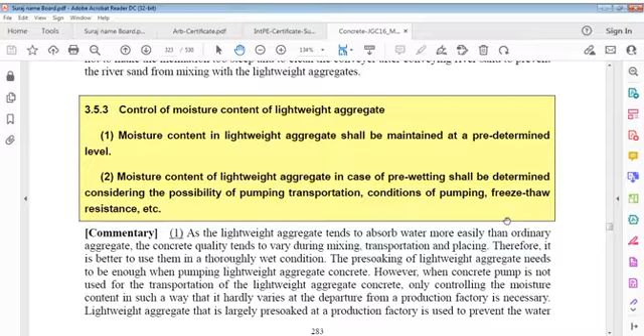I will just refresh the last paragraph - transportation systems, lightweight aggregate. We talked about control of moisture content of lightweight aggregate, and also about mixing. How the concrete mix should be, what it should be, this is also very important.

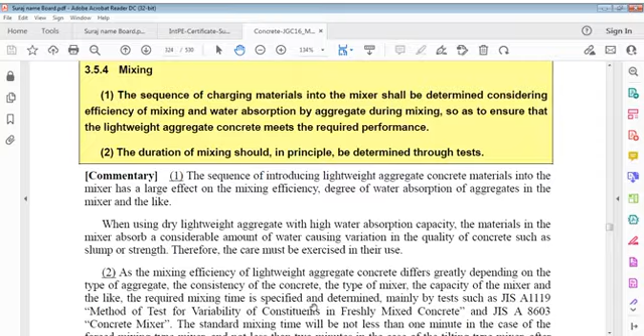Duration of mixing should in principle be determined through tests. Sequence of introducing lightweight aggregate concrete materials into mixer has a large effect on mixing efficiency, degree of water absorption of aggregate in mixer, and the like. In whichever sequence we put those materials into the mixer, it makes a difference to the concrete and to mixing efficiency.

We need all the materials put into the mixer to mix properly in the correct manner. Sequence of introducing lightweight aggregate concrete materials into mixer has a large effect on mixing efficiency, degree of water absorption.

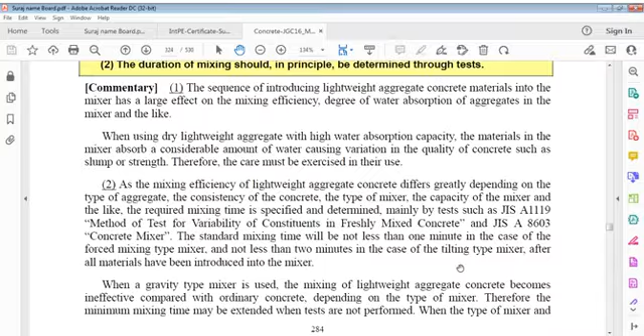Dry lightweight aggregate. When using dry lightweight aggregate, the high water absorption capacity materials in the mixer absorb a considerable amount of water, causing variation in quality of concrete, such as slump or strength.

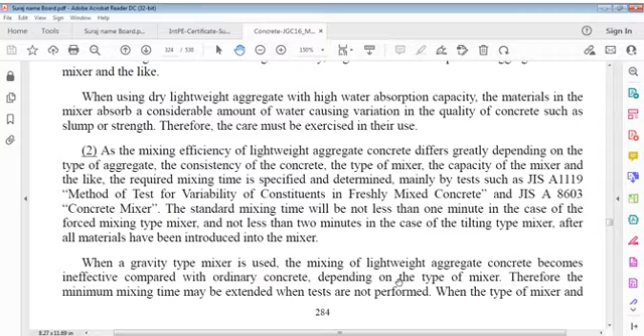Therefore, care must be exercised in respect to use. As mixing efficiency of lightweight aggregate concrete differs greatly depending on type of aggregate, consistency of concrete, type of mixer, capacity of mixer, and the like, required mixing time is specified and determined mainly by tests.

Method of tests for variability of constituents in freshly mixed concrete.

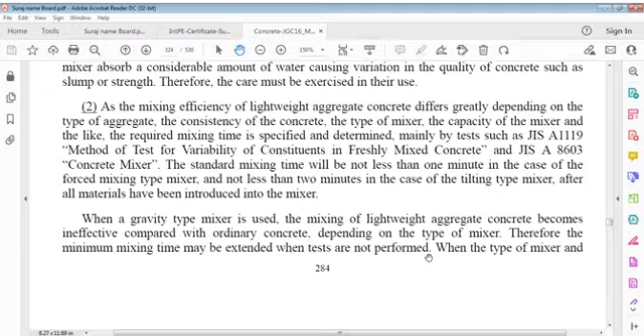Standard mixing time shall be not less than 1 minute in case of forced mixing type mixer and not less than 2 minutes in case of tilting type mixer after all materials have been introduced into mixer. When a gravity type mixer is used, mixing of lightweight aggregate concrete becomes ineffective compared with ordinary concrete depending on type of mixer. Therefore, minimum mixing time may be extended when tests are not performed.

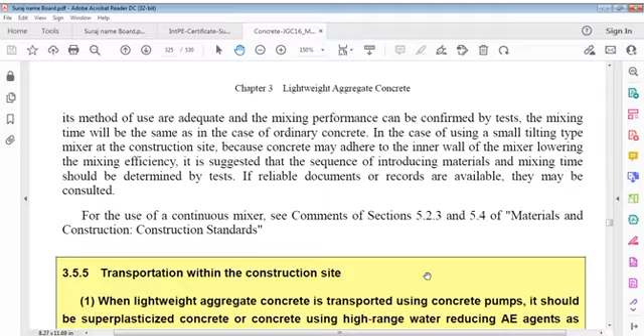Its method of use are adequate and mixing performance can be confirmed by tests. Mixing time shall be same as in case of ordinary concrete. In case of a small tilting type mixer at construction site, because concrete may adhere to inner wall of mixer, lowering mixing efficiency, it is suggested that sequence of introducing materials and mixing time should be determined by tests.

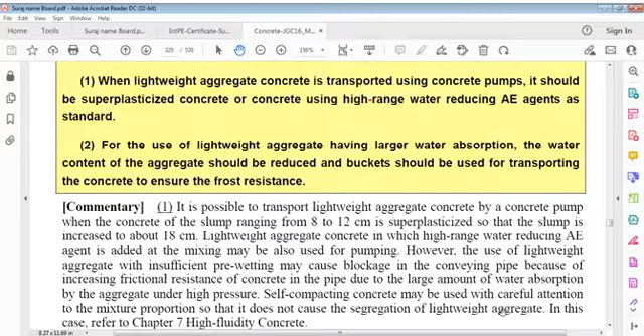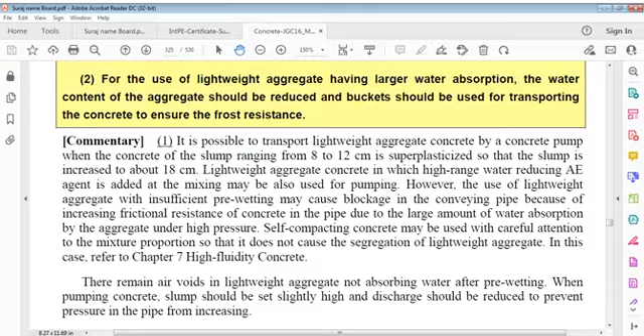For use of lightweight aggregate having large water absorption, water content of aggregate should be reduced, and buckets should be used for transporting concrete to ensure frost resistance.

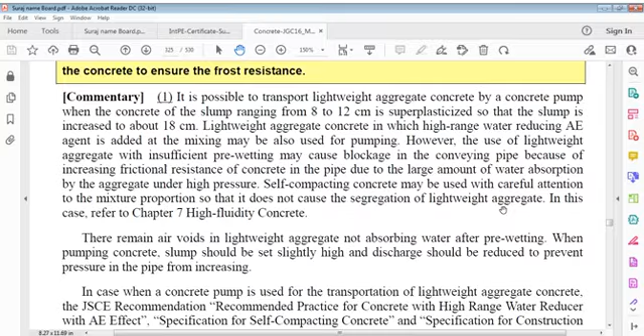It is possible to transport lightweight aggregate concrete by a concrete pump when concrete of slump ranging from 80 to 120 mm is superplasticized so that slump is increased to about 180 mm. Lightweight aggregate concrete in which high-range water-reducing and air-entraining agent is added at mixing may also be used for pumping.

However, use of lightweight aggregate with insufficient pre-wetting may cause blockage in conveying pipe because of increasing frictional resistance of concrete in pipe due to large amount of water absorption by aggregate under high pressure.

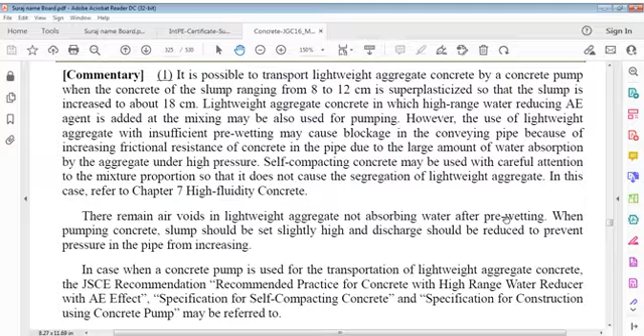Self-compacting concrete may be used with careful attention to mixture proportions so that it doesn't cause segregation of lightweight aggregate. In this case, we have to study high fluidity concrete.

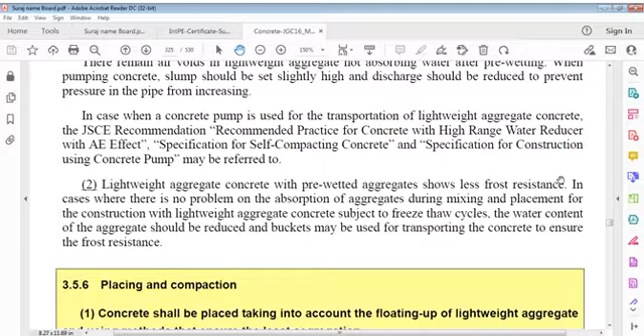When pumping concrete, slump should be set slightly high and discharge should be reduced to prevent pressure in pipe from increasing. In case a concrete pump is used for transportation of lightweight aggregate concrete, recommendations we have to see about concrete with high range water reducer with air entraining effect.

Then specifications for self-compacting concrete and specifications for concrete using concrete pump.

Lightweight aggregate concrete with pre-wetted aggregate shows less frost resistance. In cases where there is no problem on absorption of aggregates during mixing and placement for construction with lightweight aggregate concrete subject to freeze-thaw cycles, water content of aggregate should be reduced and buckets may be used for transporting concrete to ensure frost resistance.

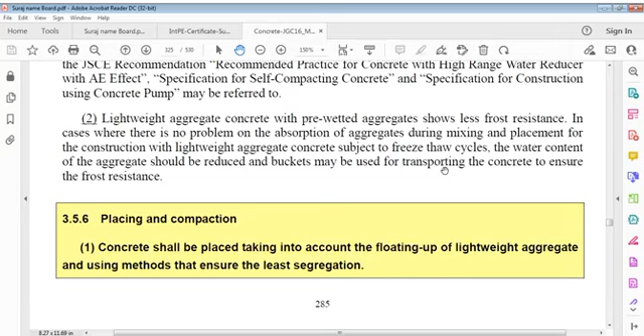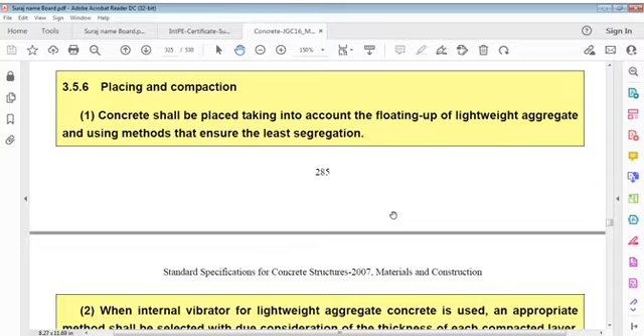Concrete shall be placed taking into account floating up of lightweight aggregate and using methods that ensure least segregation.

When internal vibrator for lightweight aggregate concrete is used, an appropriate method shall be selected with due consideration of thickness of each compacted layer, duration of vibration, and spacing interval between vibrated points.

When an internal vibrator for lightweight aggregate concrete is used, an appropriate method shall be selected with due consideration of the thickness of each compacted layer, duration of vibration, spacing, and interval between vibrated points.

Segregation of lightweight aggregate concrete occurs because coarse aggregate tends to float and mortar tends to sediment, which is the reverse tendency to that of normal weight concrete.

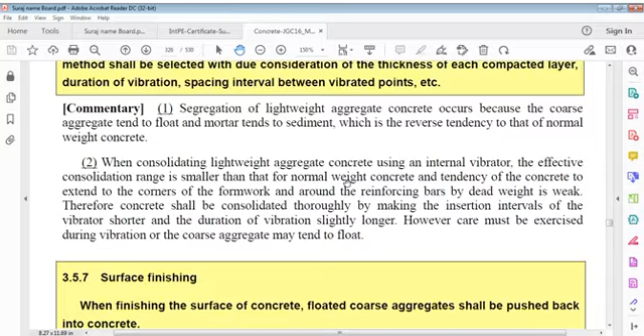When consolidating lightweight aggregate concrete using an internal vibrator, the effective consolidation range is smaller than that for normal weight concrete, and the tendency of concrete to extend to corners of formwork and around reinforcing bars by dead weight is weak. Therefore, concrete shall be consolidated thoroughly by making insertion intervals of the vibrator shorter and duration of vibration slightly longer. However, care must be exercised during vibration, as coarse aggregate may tend to float.

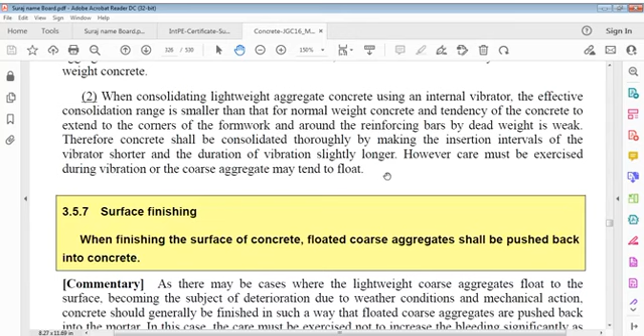Therefore, concrete shall be consolidated thoroughly by making insertion intervals of the vibrator shorter and duration of vibration slightly longer. However, care must be exercised, as during vibration coarse aggregate may tend to float.

Surface finishing: what to do, how to do it, that's also an important point.

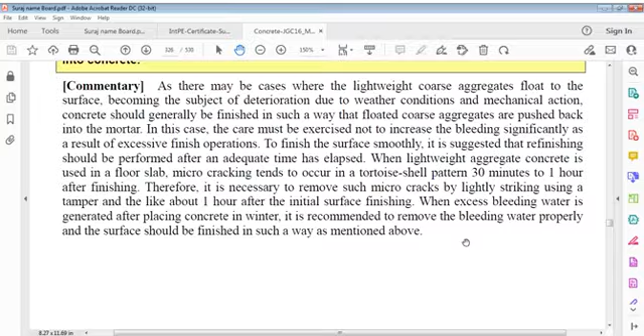When lightweight aggregate concrete is used in a floor slab, micro cracking tends to occur in a tortoise shell pattern 30 minutes to 1 hour after finishing. Therefore, it is necessary to remove such micro cracks by lightly striking using a tamper, about 1 hour after initial surface finishing. When excess bleeding water is generated after placing concrete in winter, it is recommended to remove bleeding water properly and the surface should be finished as mentioned above.

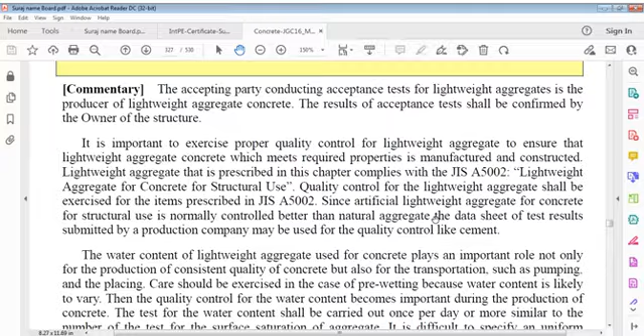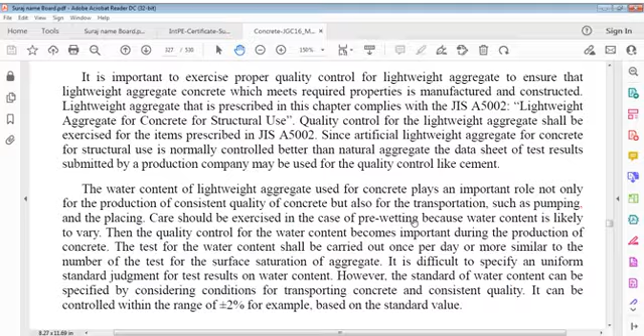Lightweight aggregate for concrete for structural use shall be as prescribed in this chapter. Quality control for lightweight aggregate shall be exercised for its items. Since artificial lightweight aggregate for concrete for structural use is normally controlled better than natural aggregate, data sheet of test results submitted by a production company may be used for quality control, like cement.

Water content of lightweight aggregate used for concrete plays an important role, not only for production of consistent quality of concrete, but also for transportation such as pumping and placing. Care should be exercised in case of pre-wetting because water content is likely to vary. Quality control for water content becomes important during production of concrete.

Test for water content shall be carried out once per day or more, similar to the number of tests for surface saturation of aggregate. It's difficult to specify a uniform standard judgment for test results on water content. However, a standard of water content can be specified by considering conditions for transporting concrete and consistent quality. It can be controlled within a range of plus minus 2%, for example, based on the standard value.

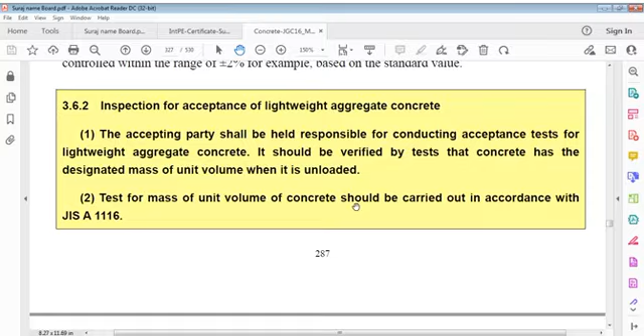Lightweight aggregate concrete acceptance inspection: the accepting party or engineer shall be held responsible for conducting acceptance test for lightweight aggregate. It should be verified by tests that concrete has designated mass of unit volume when it is unloaded. Tests for mass of unit volume of concrete should be carried out in accordance with this. Mass of unit volume of concrete shall be within the range specified at the design stage.

Difference between bulk density obtained by test and that calculated from specified mix proportion shall be less than 50 kg per meter cube. Mass of unit volume of concrete shall be within the range specified at the design stage. In addition, the difference between bulk density obtained by test and that calculated from specified mix proportion shall be less than 50 kg per meter cube.

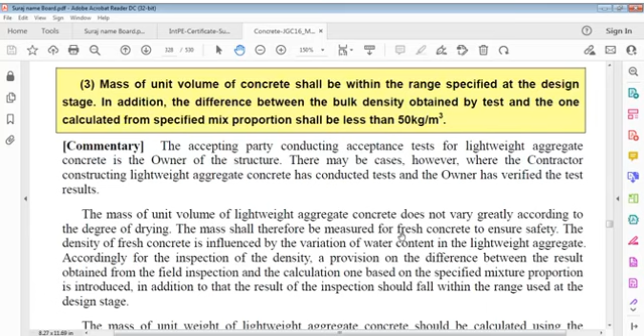Accepting party or engineer conducting acceptance test for lightweight aggregate concrete is the owner of the structure. There may be cases, however, where the contractor constructing lightweight aggregate concrete has conducted tests and an engineer or owner has verified the test results. Mass of unit volume of lightweight aggregate concrete does not vary greatly according to degree of drying. Mass shall therefore be measured for fresh concrete to ensure safety.

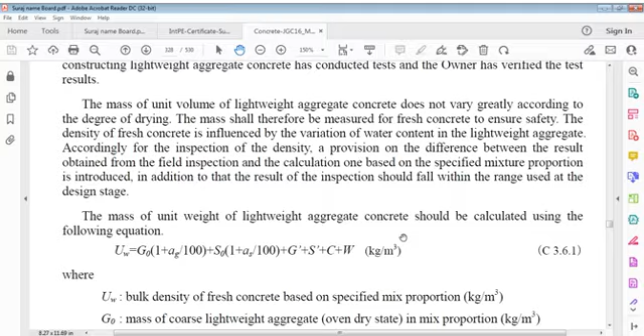Density of fresh concrete is influenced by variation of water content in lightweight aggregate. Accordingly, for inspection of density, a provision on the difference between the result obtained from field inspection and calculation based on specified mixture proportion is introduced, in addition to the requirement that the result of inspection should fall within the range used in the design stage. Mass of unit weight of lightweight aggregate concrete should be calculated using the following equation.

UW is equal to G0(1 + AG/100) + S0(1 + AS/100) + G + S + C + W, in kilogram per meter cube, where UW is the bulk density of fresh concrete based on specified mixed proportion, in kilogram per meter cube. G0 is the mass of coarse lightweight aggregate in oven dry state in mixed proportion, in kilogram per meter cube. AG is...

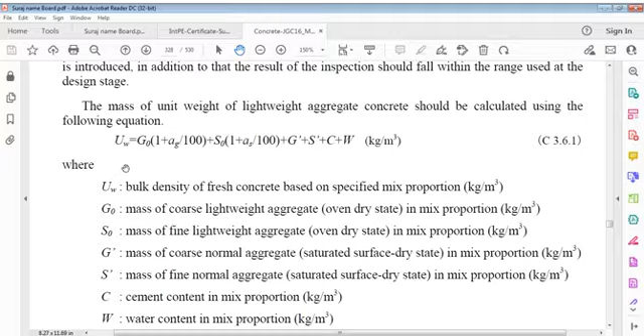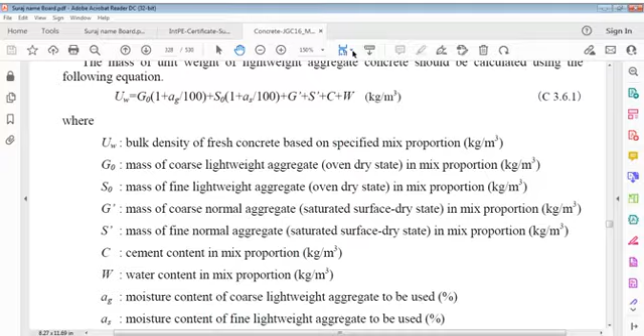S0 is the mass of fine lightweight aggregate in oven dry state in mixed proportion, in kilogram per meter cube. G is the mass of coarse normal aggregate in saturated surface dry state in mixed proportion, in kilogram per meter cube. S is the mass of fine normal aggregate in saturated surface dry state in mixed proportion, in kilogram per meter cube. C is cement content in mixed proportion, in kilogram per meter cube. W is water content in mixed proportion, in kilogram per meter cube.

AG is the moisture content of coarse lightweight aggregate to be used, in percentage, and AS is the moisture content of fine lightweight aggregate to be used. Inspections for other parameters than mass of unit volume of lightweight aggregate concrete should be conducted in accordance with the chapter on materials of construction.

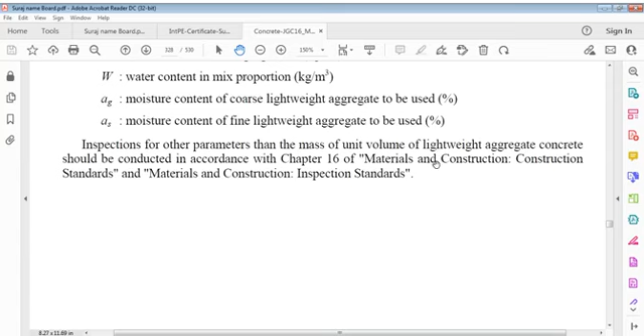Now we go to concrete using continuous fiber reinforced materials, CFRM. This is also something very important, and we have to understand the facts of this. That's what it says. So let's go and see how it works.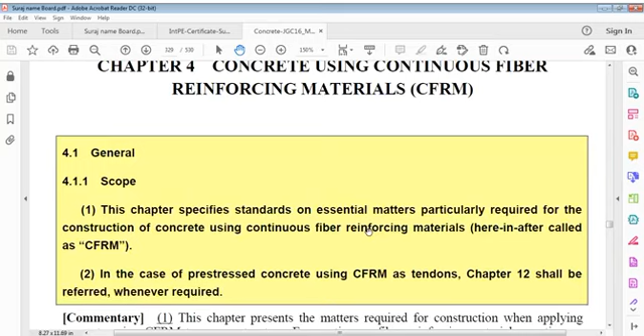This chapter specifies standards on essential matters particularly required for construction of concrete using continuous fiber reinforcing material.

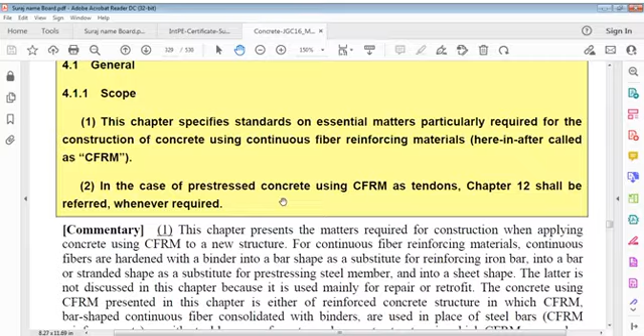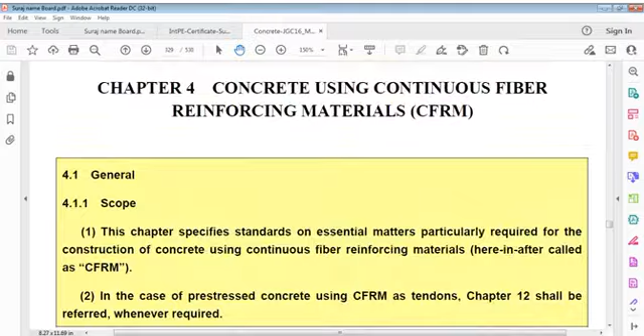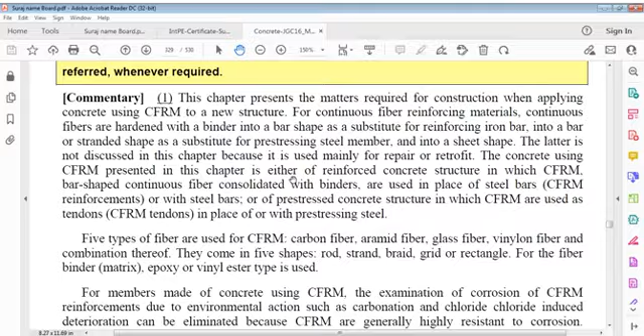तो आप समझ गए होंगे, CFRM एक तरह की reinforcement ही है जो काम आती है कंक्रीट में, और ये bars बनाए जा सकते हैं इसके fiber के, और ये एक तरह का work है आपको समझाने के लिए। अभी use इतना मेरे हिसाब से नहीं हो रहा है।

5 types of fibers are used as CFRM: carbon fiber, aramid fiber, glass fiber, vinylon fiber, and combination of carbon, aramid, glass, vinylon fiber and combination of each other. They come in 5 shapes: rod, strand, braid, grid or rectangle.

For fiber binder matrix, epoxy or vinyl ester type is used. So, 5 तरह के fibers होते हैं CFRM में, continuous fiber reinforcing material: carbon fiber, aramid fiber, glass fiber, vinylon fiber and combination thereof. They come in 5 shapes: rods, strand, braid, grid or rectangle. For fiber binder matrix, epoxy or vinyl ester type is used.

For members made of concrete using CFRM, examination of corrosion due to environmental action such as carbonation and chloride-induced deterioration can be eliminated because CFRM are generally highly resistant to corrosion. ये कहते हैं, जब हम CFRM use करेंगे तो शायद जंग लगने का खतरा इतना नहीं होगा जो steel के सरिये से होता है, क्योंकि इसमें resistance ज़्यादा होता है। जबकि carbon steel सरिये में resistance कम होता है।

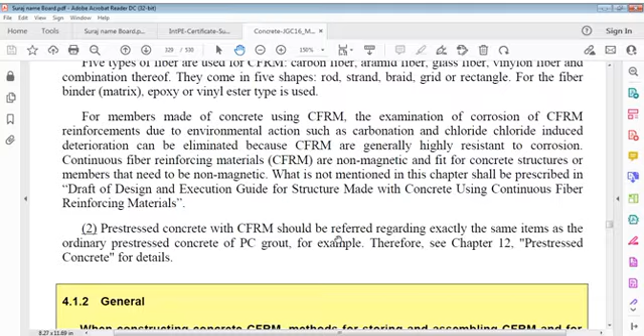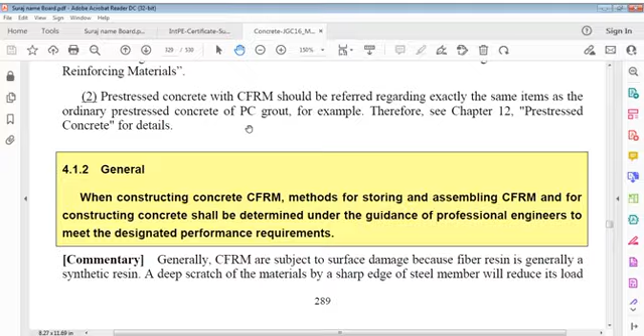Continuous fiber reinforcing materials (CFRM) are non-magnetic and fit for concrete structures or members that need to be non-magnetic. What is not mentioned in this chapter shall be described in draft design documents. Pre-stressed concrete with CFRM should refer to the same items as in ordinary pre-stressed concrete for PC grout. When constructing concrete with CFRM, methods for storing and assembling CFRM, and for constructing concrete, shall be determined under guidance of professional engineers to meet designated performance requirements.

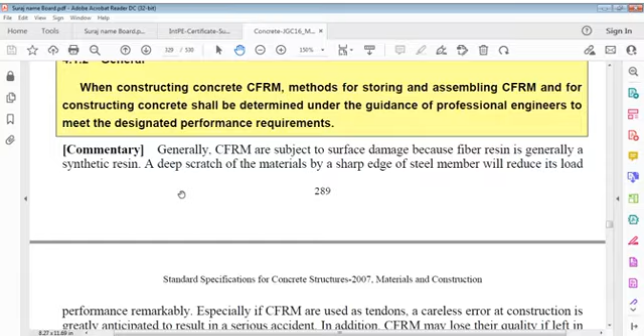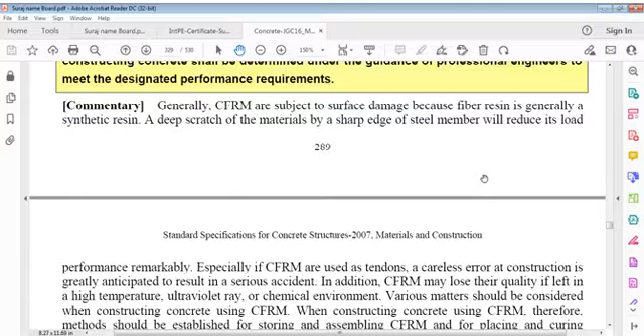Generally, CFRM are subject to surface damage because the fiber resin is generally a synthetic one. A deep scratch of material by a sharp edge of a steel member will remarkably reduce its load performance. Especially if CFRM are used as tendons, a careless error during construction is greatly anticipated to result in serious accidents. ज़रा सी भी error हो जाए tendon पे, CFRM के ऊपर, तो उससे काफ़ी नुकसान हो सकता है। In addition, CFRM may lose their quality if left in high temperature। Quality high temperature में ख़राब हो सकती है। CFRM may lose quality if left in high temperature.

Ultraviolet ray exposure and chemical environment are various matters that should be considered when constructing concrete using CFRM.

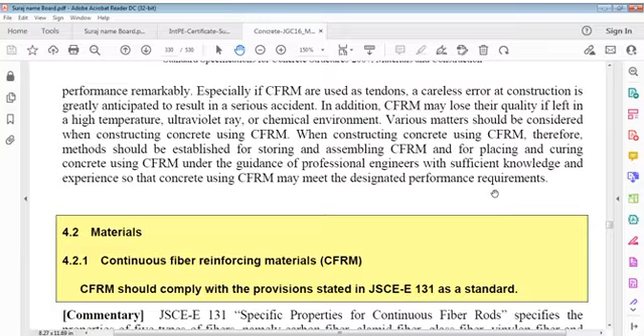When constructing concrete using CFRM, methods should be established for storing and assembling. बताया जाना चाहिए उस method में कि इसको हम कैसे store करेंगे, भंडार में रखेंगे, और किस तरह से बनाएंगे, जोड़ेंगे, assemble करेंगे — for placing and curing concrete using CFRM under guidance of professional engineers with sufficient knowledge and experience, so that concrete using CFRM may meet designated performance requirements।

इसमें materials क्या है? Continuous fiber reinforcing material, that's the important one we know, and CFRM should comply with provisions.

So commentaries में materials के बारे में क्या कहा गया है? Specific properties for continuous fiber rods specify properties of 5 types of fibers, namely carbon fiber, aramid fiber, glass fiber, vinylon fiber and mixed fiber. It contains mechanical properties, nominal diameter, and maximum dimensions for fiber types, namely rods, strands, lattices and rectangular shapes.

These specifications may be used as properties due to the fact that the type of fibers and volume ratio of amount contained control mechanical properties of continuous fiber rods. Assured tensile strength, Young's coefficient, elongation, relaxation, and so on are specified according to a combination of rod types and fibers used. Similarly, nominal diameters and maximum dimensions are specified for each combination.

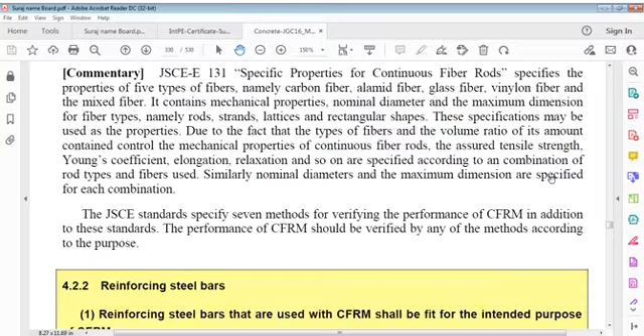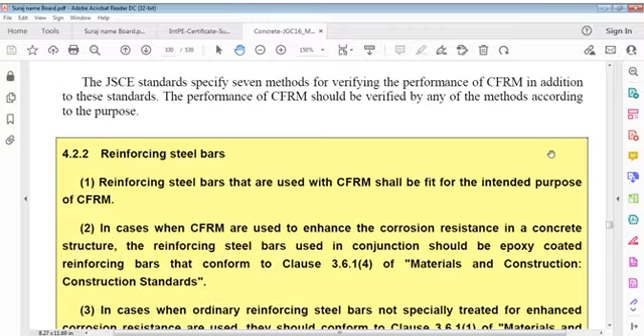What are these? The standard specifies 7 methods for verifying performance of CFRM. In addition to these standards, performance of CFRM should be verified by either of the methods according to purpose.

Now, reinforcing steel bars that you take into consideration. Reinforcing steel bars that are used with CFRM shall be fit for the intended purpose of CFRM. In cases where CFRM are used to enhance corrosion resistance in a concrete structure, reinforcing steel bars used in conjunction should be epoxy coated. It's a point here.

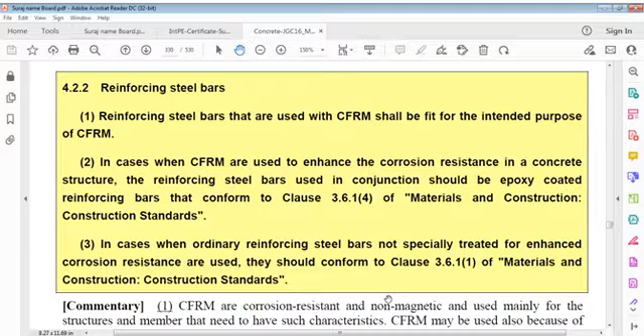Reinforcing bars that conform to the clause materials and construction. In cases when ordinary reinforcing steel bars not specially treated for enhanced corrosion resistance are used, they should conform to the clauses, materials and construction standards.

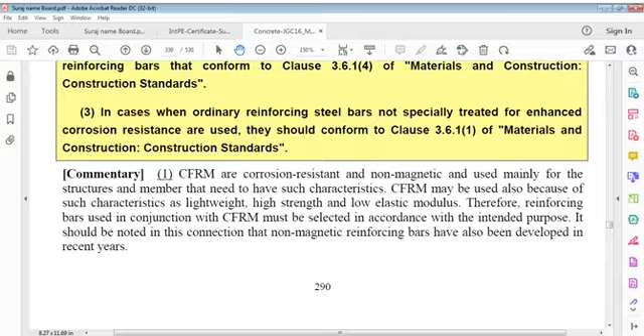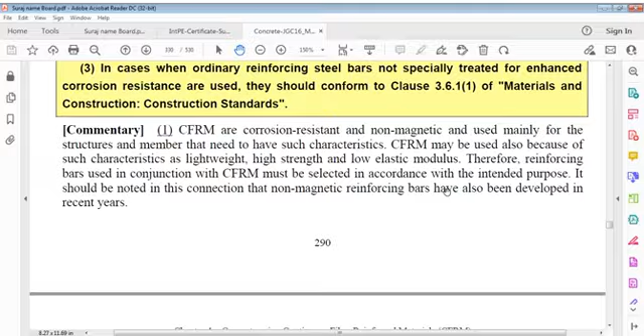In cases when ordinary reinforcing steel bars not specifically treated for enhanced corrosion resistance are used, these should conform to materials and construction standards. CFRM are corrosion resistant and non-magnetic and used mainly for structures and members that need such characteristics. CFRM may also be used because of characteristics such as lightweight, high strength and low elastic modulus. Reinforcing bars used in conjunction with CFRM must be selected in accordance with the intended purpose. It should be noted that non-magnetic reinforcing bars have also been developed in recent years. Now we'll have little considerations on this, and you have to wait a little.

You can read it for the time being. This is the more important one.

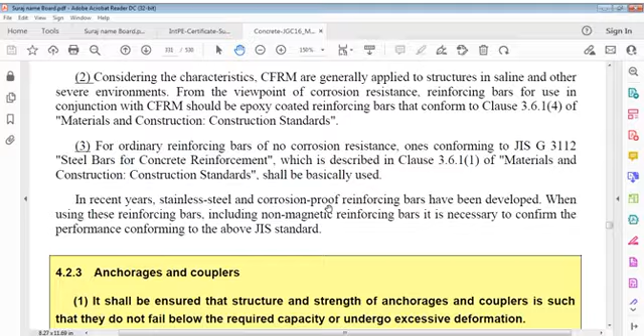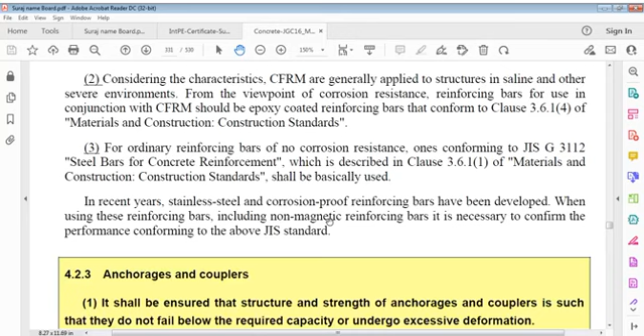You have to see, meaning considering characteristics. CFRM are generally applied to structures in saline and other severe environments. From the viewpoint of corrosion resistance, reinforcing bars for use in conjunction with CFRM should be epoxy coated reinforcing bars that conform to the clause. Now, for ordinary reinforcing bars with no corrosion resistance,

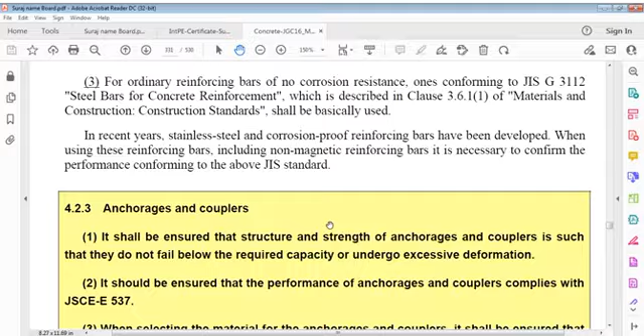once conforming to the requirement, steel bars for concrete reinforcement, which is described for materials in construction, shall be basically used. In recent years, stainless steel and corrosion-proof reinforcing bars have been developed. When using these reinforcing bars, including non-magnetic reinforcing bars, it is necessary to confirm

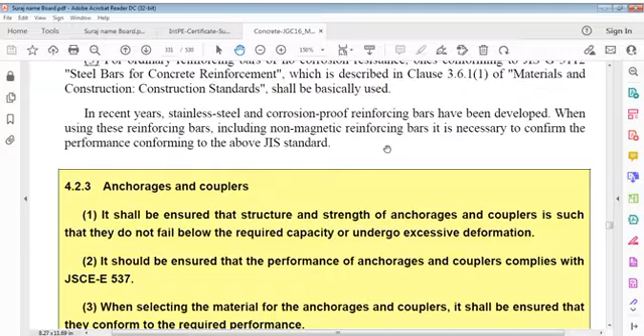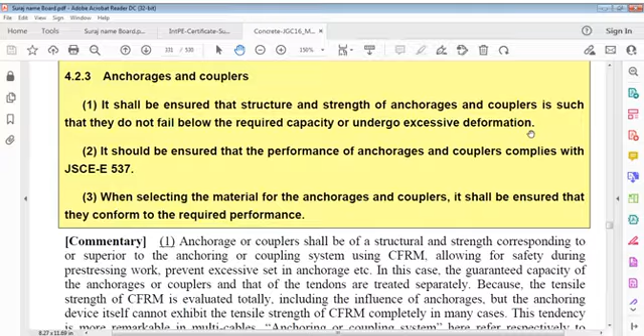performance conforming to the above. Anchorage and couplers: it shall be ensured that the structure and strength of anchorages and couplers is such that they do not fail below required capacity or undergo excessive deformation. It should be ensured that performance of anchorages and couplers complies with the requirement. When selecting materials for anchorages and couplers, it shall be ensured that they conform to required performance.

Anchorage or coupler shall be of structural and strength corresponding to or superior to the anchoring or coupling system using CFRM, allowing for safety during pre-stressing work.

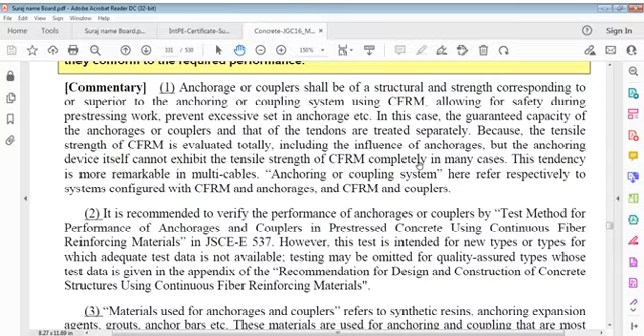Anchoring or coupling system here refer respectively to systems configured with CFRM and anchorages, and CFRM and couplers. It is therefore recommended to verify performance of anchorages or couplers by the test method for performance of anchorages and couplers in pre-stressed concrete using continuous fiber reinforcing materials. However, this test is intended for new types or types for which adequate test data is not available. Testing may be omitted for quality assured types whose test data is given, and we have to see that.

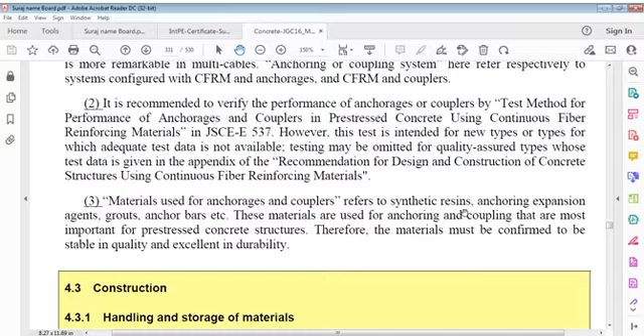Materials used for anchorage and couplers refer to synthetic resins. Anchoring expansion.

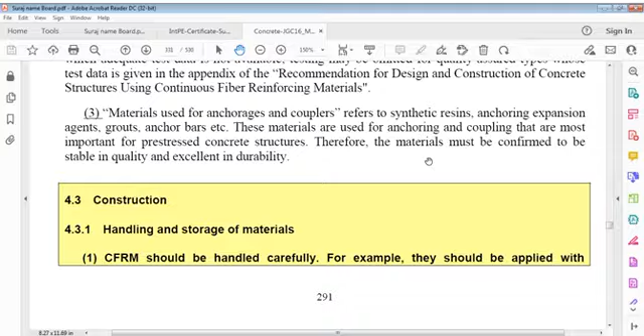Materials used for anchorages and couplers refer to synthetic resins, anchoring, expansion agents, grouts, anchor bars, etc. These materials are used for anchoring and coupling that are most important for pre-stressed concrete structures. Materials must be confirmed to be stable in quality and excellent in durability. Now, construction, handling and storage of materials.

What to do about that? Handling and storage of materials.

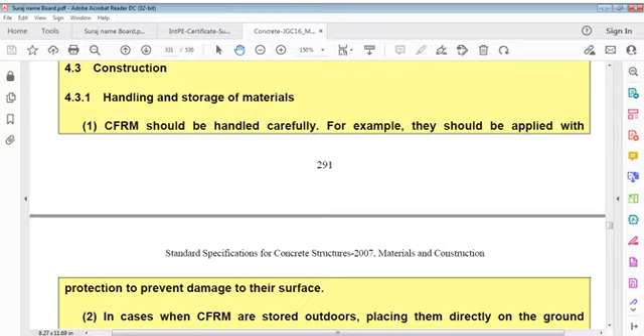CFRM should be handled carefully. For example, these should be applied with protection to prevent damage to surface. In cases when CFRM are stored outdoors, placing them directly on ground should be avoided, and they shall be suitably covered. Even when CFRM are stored indoors, placing them directly on floor should be avoided.

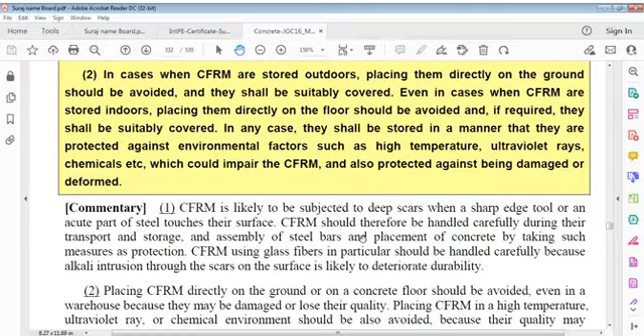CFRM is likely to be subject to deep scars.

CFRM is likely to be subject to deep scars when a sharp-edged tool or an acute part of steel touches their surface.

CFRM is likely to be subject to deep scars when a sharp-edged tool or an acute part of steel touches its surface.

CFRM should therefore be handled carefully during its transport and storage, and assembly of steel bars and placement of concrete by taking such measures as protection.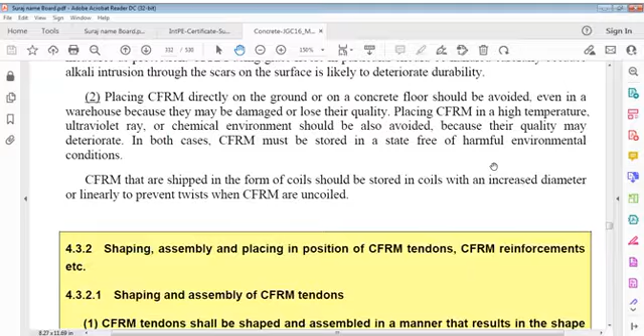CFRM that are shipped in form of coils should be stored in coils with an increased diameter or linearly to prevent twist in CFRM when uncoiled.

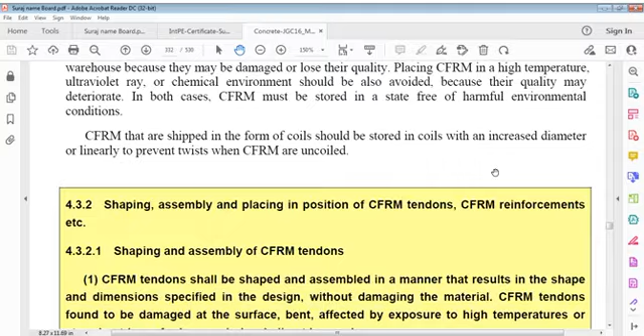Shaping, assembly and placing in position of CFRM tendons, CFRM reinforcement, etc.

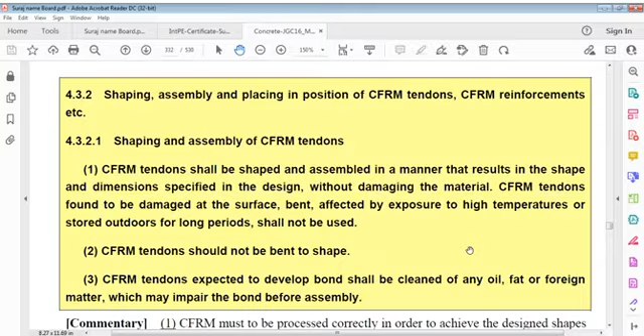Shaping and assembly of CFRM tendons. CFRM tendons shall be shaped and assembled in a manner that results in shape and dimensions specified in design without damaging materials. CFRM tendons found to be damaged at surface, bent, affected by exposure to high temperature, or stored outside or outdoors for long periods shall not be used.

This is a very important point: CFRM tendons found to be damaged at surface, bent, or affected by exposure to high temperature.

CFRM tendons shall be shaped and assembled in a manner that results in shape and dimensions specified in design without damaging material. CFRM tendons found to be damaged at surface, bent, affected by exposure to high temperature, or stored outdoors for long periods shall not be used.

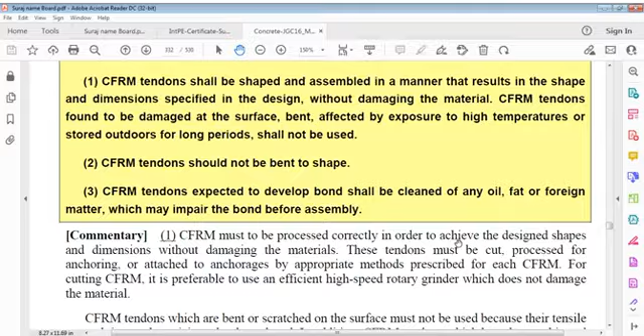CFRM tendons should not be bent to shape. CFRM tendons expected to develop bond shall be cleaned of any oil, fat or foreign matter which may impair bond before assembly. CFRM must be processed correctly in order to achieve designed shapes and dimensions without damaging materials.

These tendons must be cut, processed for anchoring, or attached to anchorages by appropriate methods prescribed for each CFRM. For cutting CFRM, it is preferable to use an efficient high-speed rotary grinder which does not damage the material.

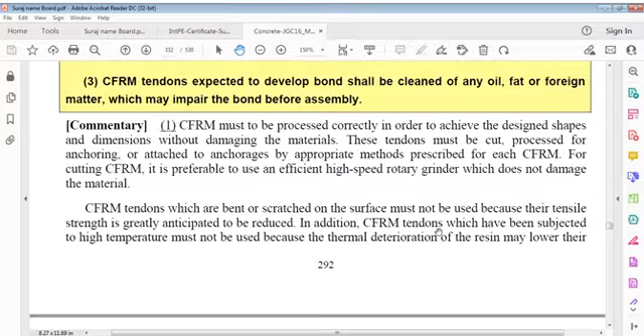CFRM tendons which are bent or scratched on the surface must not be used because tensile strength is greatly anticipated to be reduced. In addition, CFRM tendons subjected to high temperature must not be used, because thermal deterioration of resin may lower its performance as a binder and reduce tensile strength of the tendons.

Under direct sunlight, some kinds of CFRM tendons may be deteriorated by ultraviolet rays. CFRM tendons that have been stored outdoors for a long period should not be used.

In general, thermosetting resins are used as binding materials for CFRM tendons. Since it is rather difficult to form such material by bending on site, both technically and in terms of quality, bend forming of CFRM is basically avoided. If bend forming is not avoidable...

However, factory processing that does not impair the material is permitted. Since tensile strength of CFRM tendons may be reduced under the influence of bend forming and internal bending radius, it is necessary to check whether tensile strength satisfies the strength required in design, by an appropriate test method that reproduces the actual state of use. This is a very important paragraph.

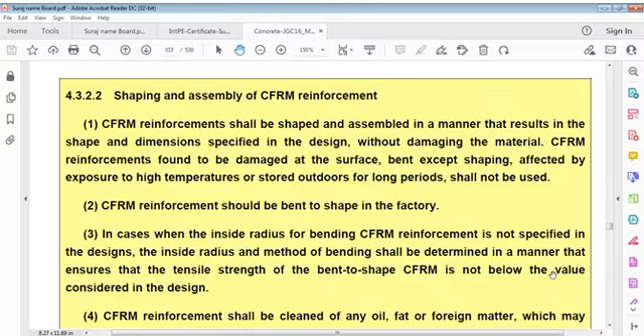CFRM reinforcement should be bent to shape in the factory. In cases when the inside radius of bending CFRM reinforcement is not specified in the design, the inside radius and method of bending shall be determined in a manner that ensures the tensile strength of the bent-to-shape CFRM is not below the value considered in design.

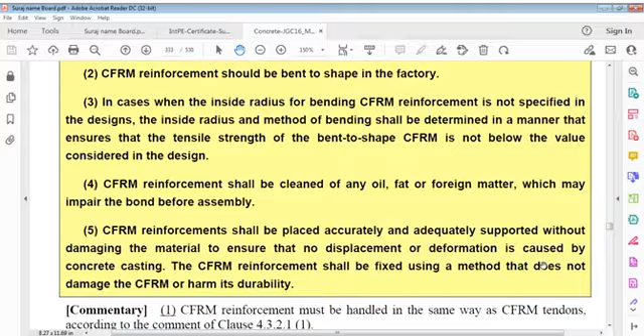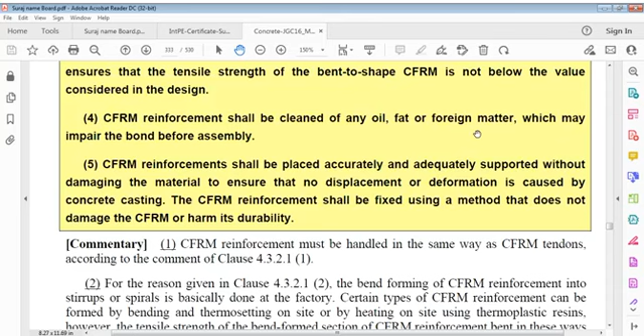CFRM reinforcement shall be cleaned of any oil, fat or foreign matter which may impair bond, before assembly. CFRM reinforcement shall be placed accurately and adequately supported without damaging the material, to ensure that no displacement or deformation is caused by concrete casting. CFRM reinforcement shall be fixed using a method that does not damage the CFRM or harm its durability.

We have some commentary. We'll see how to do it if it's possible. Light is actually not available, and that is the main cause. No electricity. Many times the light has gone today.